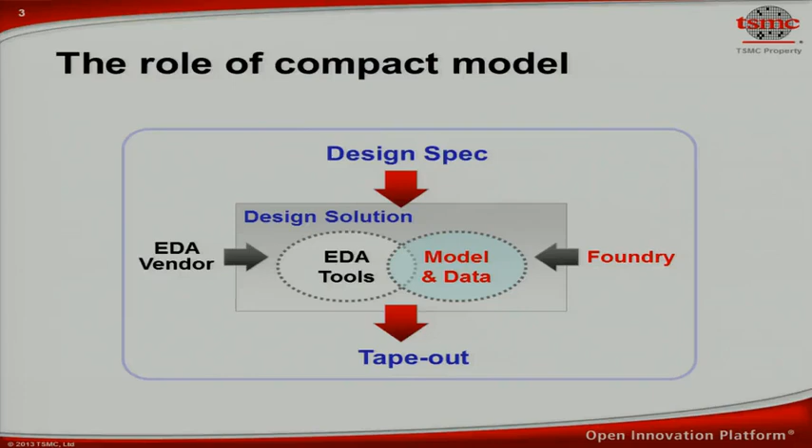Then we need to center our model away from silicon, since sometimes silicon is not on target yet. So we need to purposely make our model away from silicon. Then we need to extract the temperature coefficient, and then we need to do the corner model to cover the worst case. Then we need to do a lot of add-on features on the model.

For example, the layout effect, the statistical features like aging model, self-heating model, those kinds of stuff. Then finally, before we release our model to the end users, we need to have a complete model QA to make sure there are no stupid bugs in our model. So basically, that's the flow for the model generation.

So in the next few pages, I'm going to talk about one particular issue that happened in this process. Okay, so the first step is to find out which silicon we need to use for modeling. So this is one example.

This is one particular parameter. This is another parameter. Okay, so this is the silicon distribution. Okay, and this is another set of electrical parameters. So another distribution taken from the wafer directly.

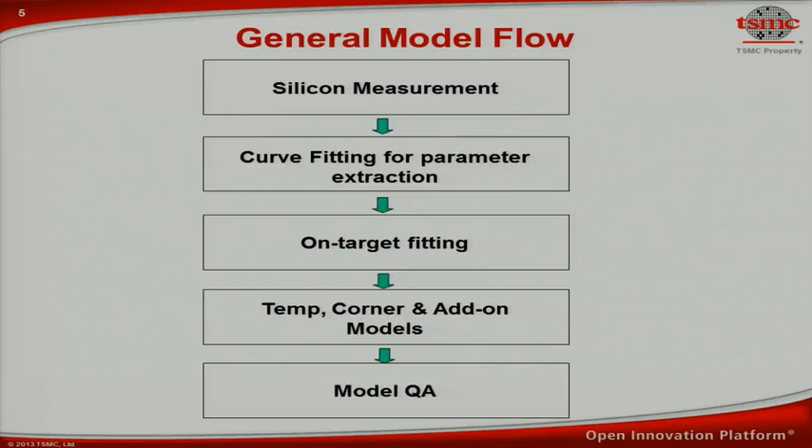So I would say when we do this kind of judgment, that depends on a few factors. One is the silicon maturity. The other one is the application driven. You need to understand what's the purpose for this model. If the purpose of this model is to understand the sensitivity for the future target, then you may want to just do a target-driven model.

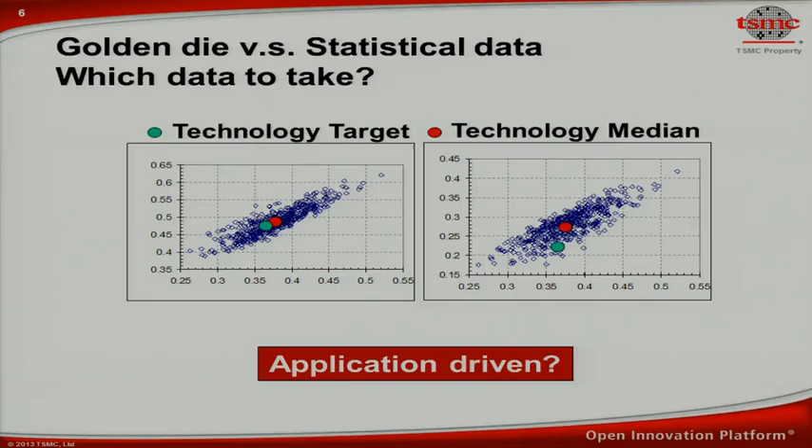So as a SPICE engineer, sometimes we have a hard time meeting all the anchor points in one model. So what are we going to do about it? Usually we will discuss with our user to understand what is the need for this model. Usually for the first order parameters like saturation current, leakage current, and threshold voltage, we can do a pretty good job to make sure our model can meet silicon behavior.

However, for the second order parameters like transconductance, like GM, GDS, we may not be able to fit to silicon 100% correctly. So like Larry says, sometimes people have too much trust in the SPICE model. Actually, that worries me a little bit. Yeah, because SPICE models do have their own limitations. Okay.

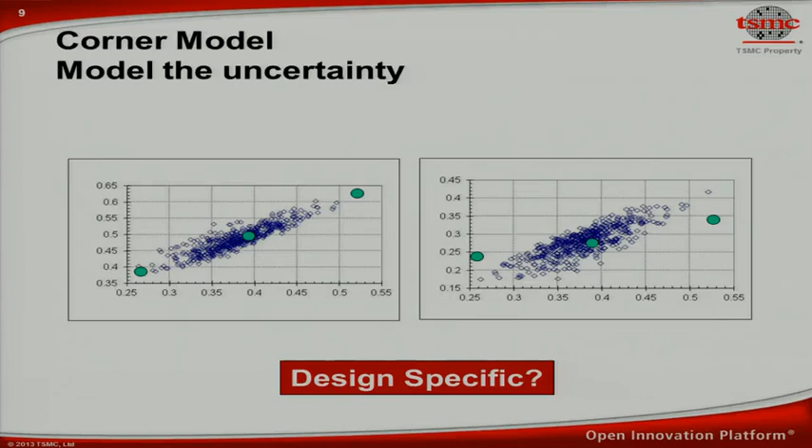Then starting from BSIM4, for example, they do have a gate current model here. So pretty much that's the so-called intrinsic model. It behaves okay for a regular transistor. However, there are some effects due to manufacturing that cannot be covered by the standard primitive model.

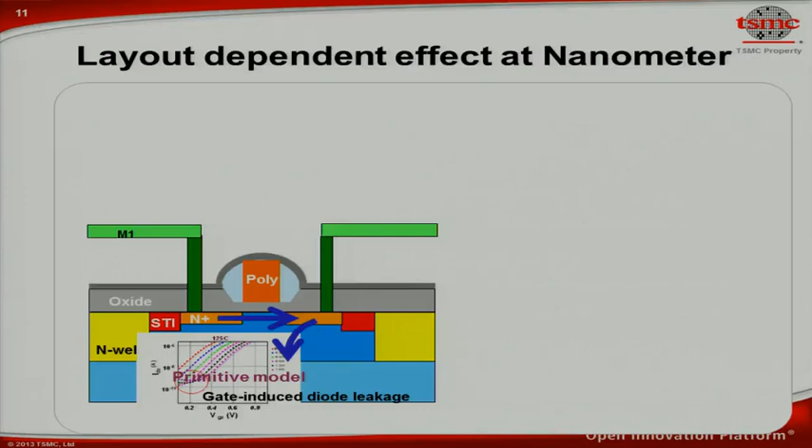For example, the final drawn width is not the same as the layout engineer drew because of rounding here due to OPC. So we need to add effective gate width over here to describe the real effective channel width. Then this one actually is environment dependent. So we need the help from the layout parameter extractor to help us.

So you see that the boundary between the transistor model and the layout extractor actually no longer exists. These two actually mix together already. And when you do an implant, the dopant cannot go to the location you want to implant anymore. So they scatter around, so there are some new effects, which may not be new anymore, but used to be new. It's the well proximity effect. So we need to have a subcircuit on top of the primitive model to describe it.

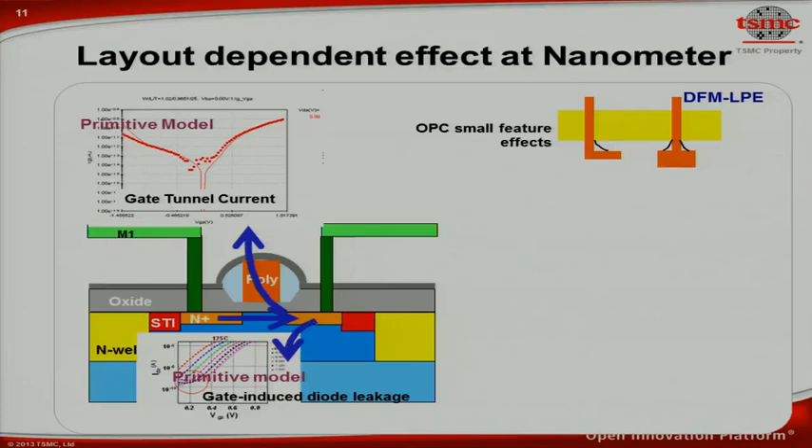Okay, and there are so many stressors. So there's the STI stress effect, and this famous LOD effect, length of OD effect. So for all of those effects, you need to have a subcircuit on top of the primitive model to make the model close to silicon. So the equation of the primitive model may not change that much. However, we need to use a very complicated subcircuit on top of the primitive model to make sure our model can reflect the silicon.

And actually, there is a lot of simulation time because you do a lot of crazy equations in the subcircuit. So they slow down the simulation a lot. Okay. And also, when we talk to the designers, usually they have some requests. Like I say, they need to have a feature to predict yield. So we need to have a statistical model. So we need to model the process variation. We need to do the mismatch model. Combining these two, we can do yield prediction for the SRAM, for example.

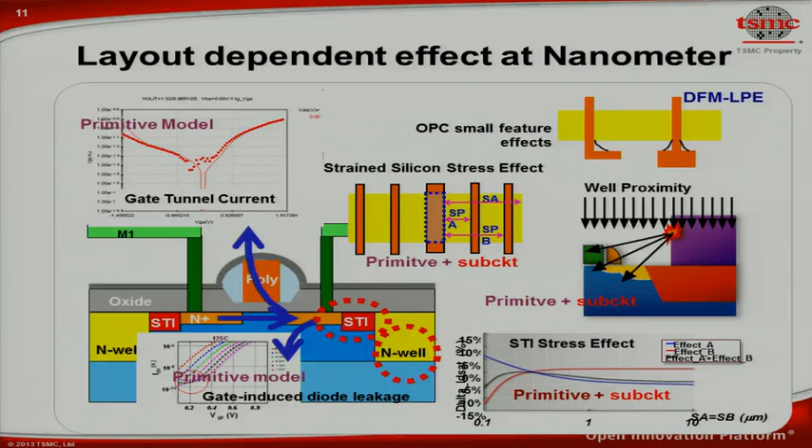Then when we build a model based on this transistor, that's the regular transistor. But when you connect two transistors together by the shared gate configuration, there's no connection out of it. So you need to make sure there's no double counting for the resistance here. This is a typical connection for the SRAM. So under this kind of situation, we need to build up a special model, or we need to remove some components out of the intrinsic model and let the layout extraction tool handle those components to prevent double counting.

Okay. And also, people overdrive their applications a lot recently. So usually people will consider an aging model, a reliability model. So we need to create a reliability model for aging simulation. So those are the features requested by our customers or by designers. And those features actually are not available in the primitive model. So there are a lot of enhancements we need to do.

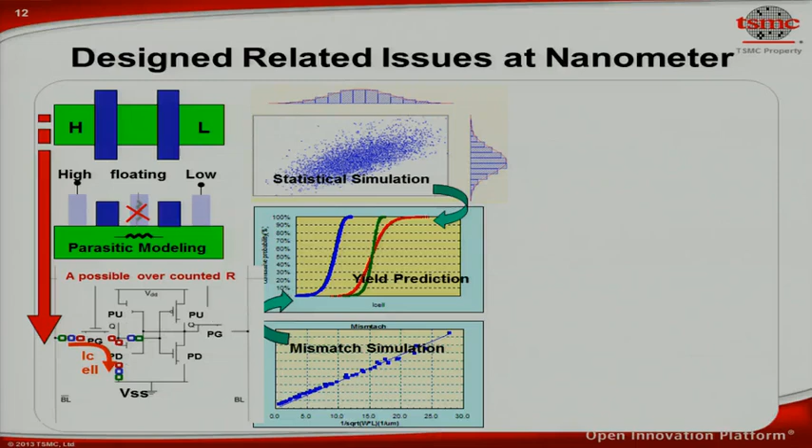So to make this enhancement handy, or make sure the model can be finished within a reasonable time with reasonable accuracy, we started a new project. We call it TSMC Model Interface. We started this project in 2007, if I remember correctly. That's 6 years ago. So we created this TSMC Model Interface.

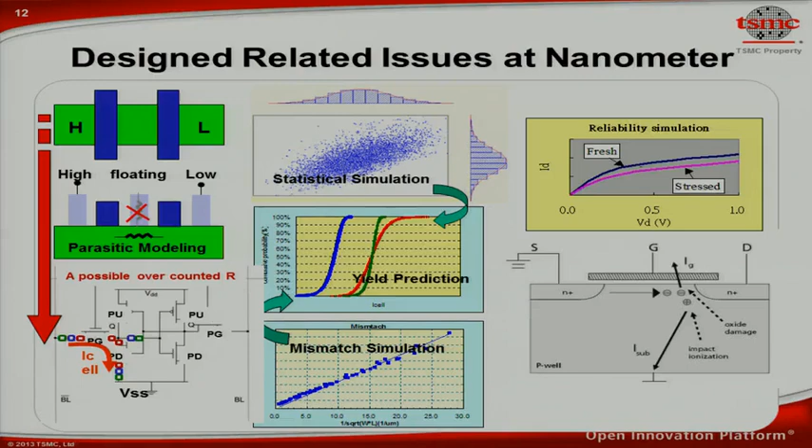And so why and what is TMI? So we understand the limitation of sub-circuit approaches. First of all, the simulation efficiency is not good. It is the burden for the primitive model. And usually it is not flexible enough. And it created a huge gap between pre-layout simulation and post-layout simulation.

And it's not portable. I mean, from simulator to simulator, from HSpice to Spectre to Eldo, it's not compatible, especially for the sub-circuit. Every simulator has its own syntax. So it's a nightmare for model engineers because we have to do the model in multiple formats. Then we need to QA our model to make sure the outcomes among different simulators are identical enough. So this is a huge nightmare for my engineers because we need to use double or triple resources and do a lot of tedious stuff.

Then if there's trouble, when we talk to the EDA vendor, usually our vendors say, how come their tool is more accurate than my tool? I think my tool should be golden. So I'm not going to fix my tool. Just talk to the other vendor, because we think the trouble is from the other vendors. So we need to negotiate among different vendors to make sure we finally get identical results. Okay? So this is the nightmare for model engineers.

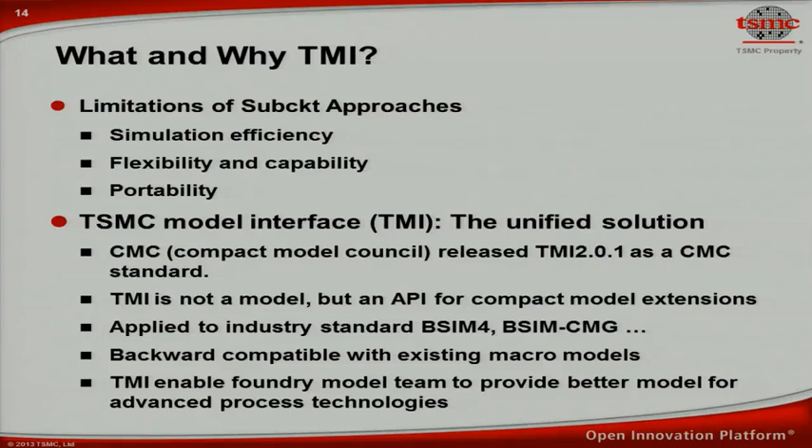And then, as I mentioned, due to different layout dependent effects or environmental effects, usually people will see a huge gap between pre-layout simulation and post-layout simulation. So TMI actually can make a much better guess for the pre-layout simulation. So people will find that the enhancement in TMI actually can reduce the gap between pre-layout and post-layout. And that's a very welcome advantage provided by TMI.

And compatibility: because the primitive model is the same, we don't need to go through the subcircuit anymore. So it's compatible among different commercial tools. That's the beautiful part of TMI. So it actually reduces our loading a lot. Okay. Then efficiency.

Since it's not a subcircuit, it's code; the new equation has been compiled into the commercial tool. So it can integrate with the commercial tool better. So the simulation time is shorter, so it's much more efficient. And also, the memory allocation is much better.

So as far as we know, using TMI, the number of transistors that can be simulated is much more compared with subcircuit. Okay, and here, expandable. Like I mentioned, sometimes people will ask for the aging model, and the aging model actually cannot be enabled by subcircuit. You need to have a special tool to do the aging model simulation. But with TMI, the aging simulation can be done by SPICE simulation.

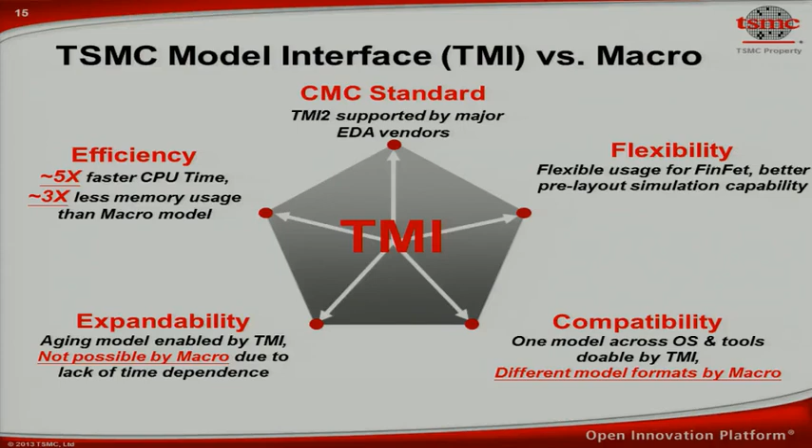Then a lot of information you can also obtain from this interface. Say, like I mentioned, the waveform. You could not do that in the past by subcircuit, but currently through TMI you can do the integration. You can integrate your power dissipation or integrate your effect in different ways based on different waveforms through TMI.

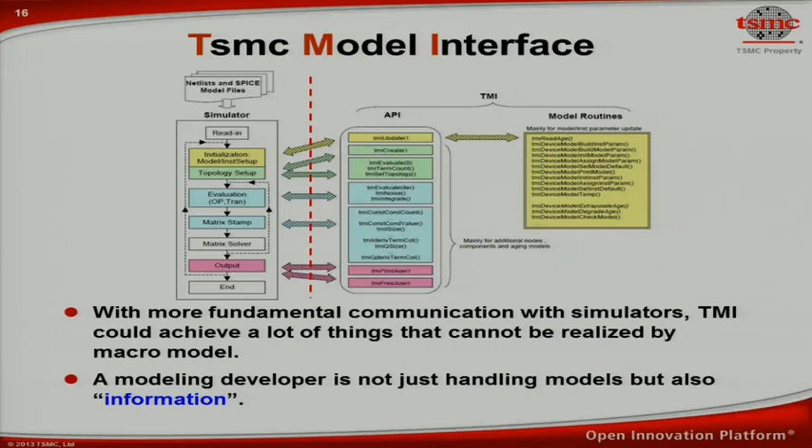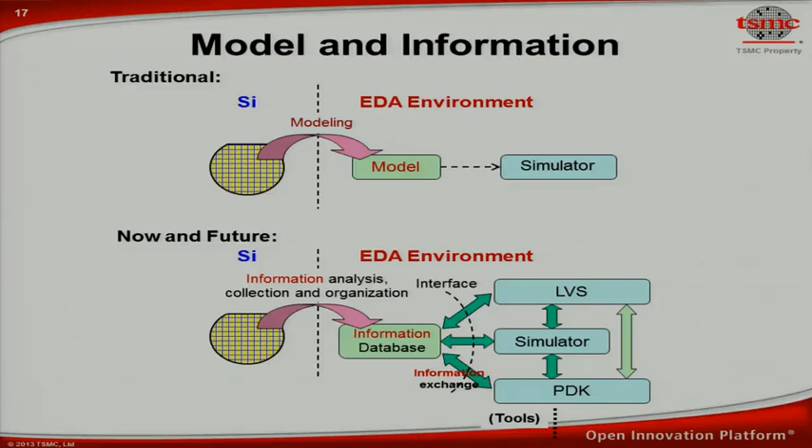So here is my summary. The compact model is actually a bridge between silicon and design. So the model has to be accurate. However, it also needs to be efficient. And so we need to build an engineering model, but we need to respect the ideal model, derived from the ideal model. And then we do have some major challenges for transistor modeling.

Layout dependent effect. We need to do good variation modeling, and then we need to take care of parasitic components. Then we need to enhance our model so it can do reliability modeling. And finally, we think we need to have a unified model platform to customize models on a common standard. And what we did in TSMC is we created TMI to try to enable all of those details into the current compact model.